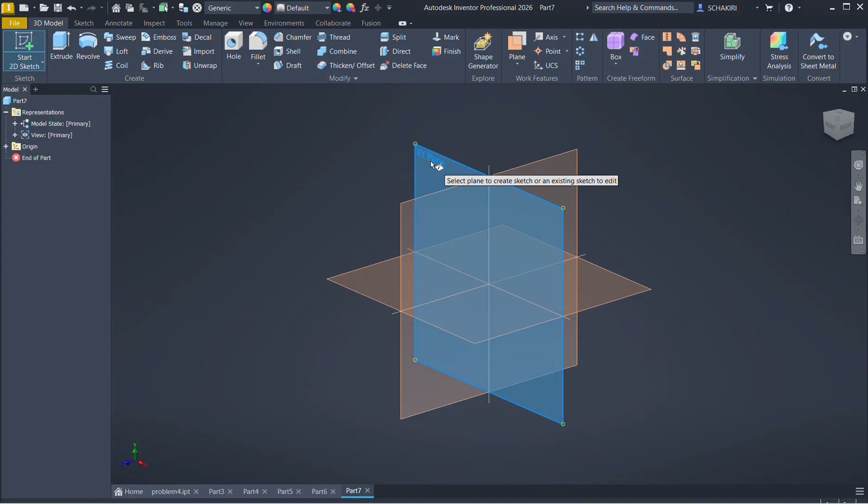So first rectangle. First of all, you should set up your units. We have here millimeter. So here you go to tools, document setting, and then you choose units and millimeter.

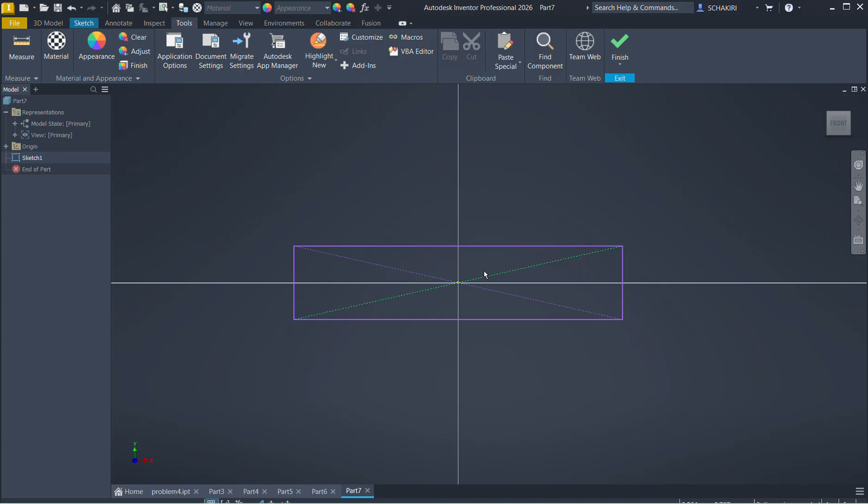So now we set up our dimensions. We have here, as we said, we have 10 millimeter, and for here we have 160. Yeah, is this surface from here to here.

So now we're gonna sketch our second rectangle like that. Of course, the dimension to make our sketch fully constrained and finished. We have the height is 35 millimeter.

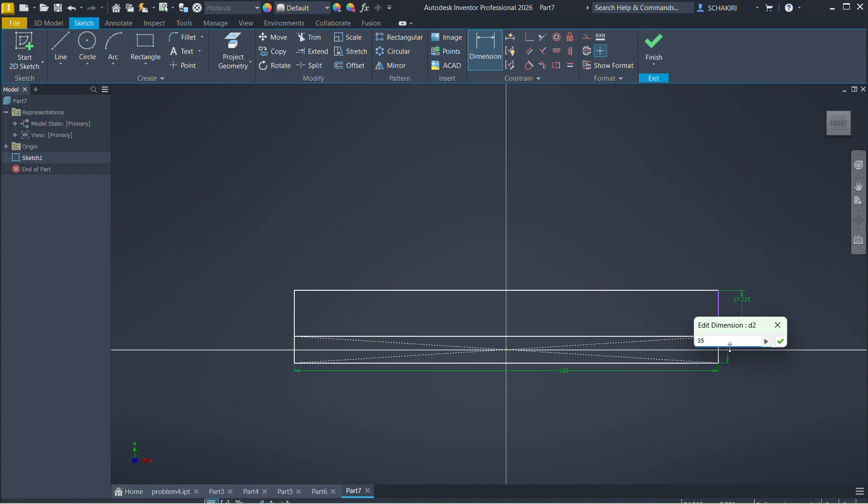And the third rectangle should be like this, who has a height of 10 millimeter. So to make these two lines finished, we should add some dimensions. Maybe we need this one.

Should remember always that we shoot dimensions from the origin of our plane. That's our origin.

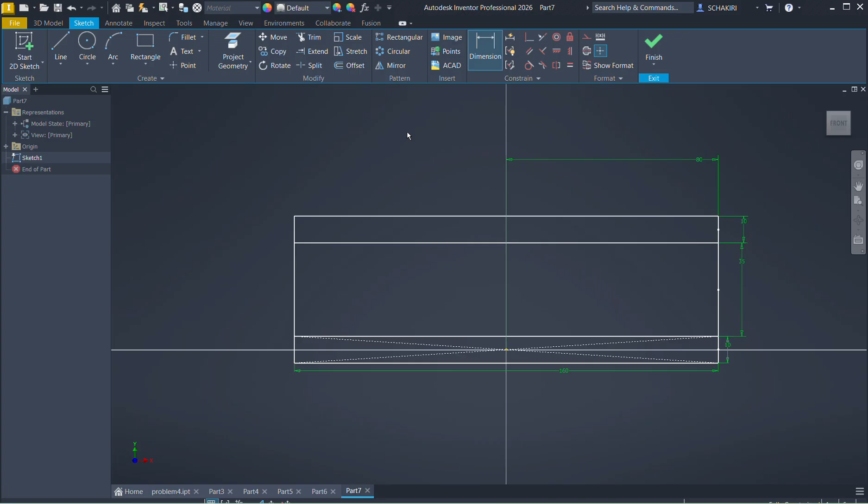So after we're gonna do the extrude, we go back always to our photo. We have here, we're gonna extrude this rectangle by 80 and this one by 10 and this one by 50.

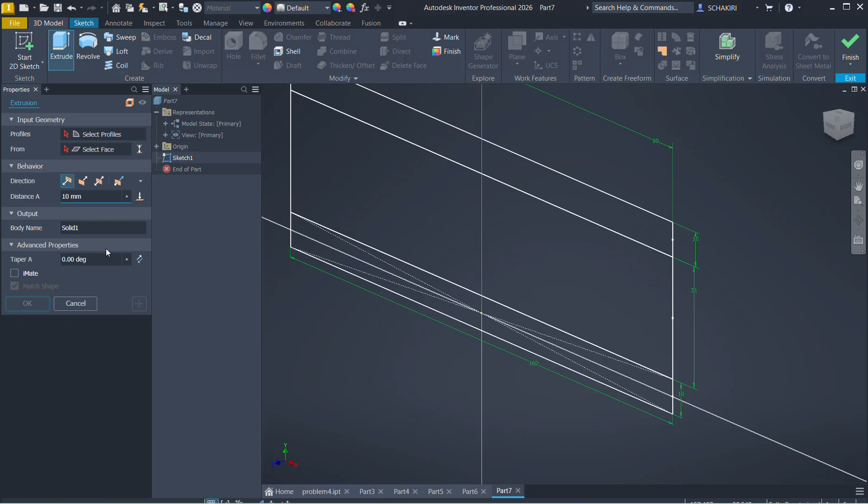So we choose the first profile. It's gonna be that one. Don't forget always to make everything symmetric. That way it's gonna be easy for the next features. Always center your sketch.

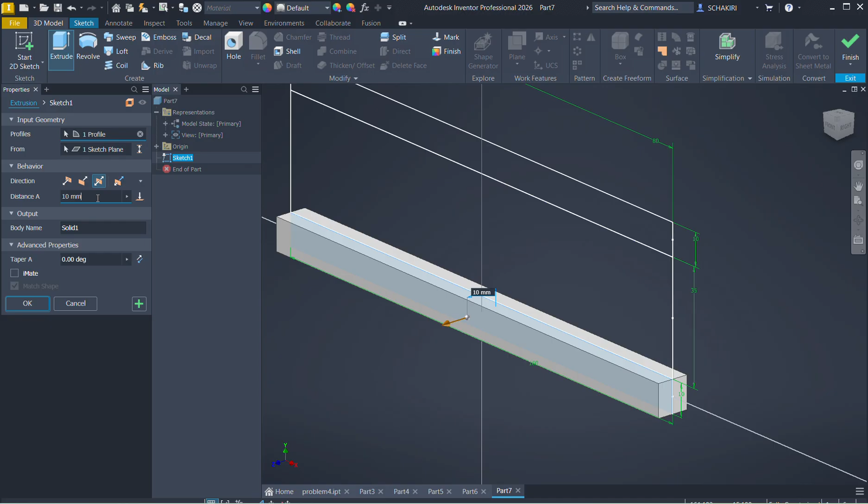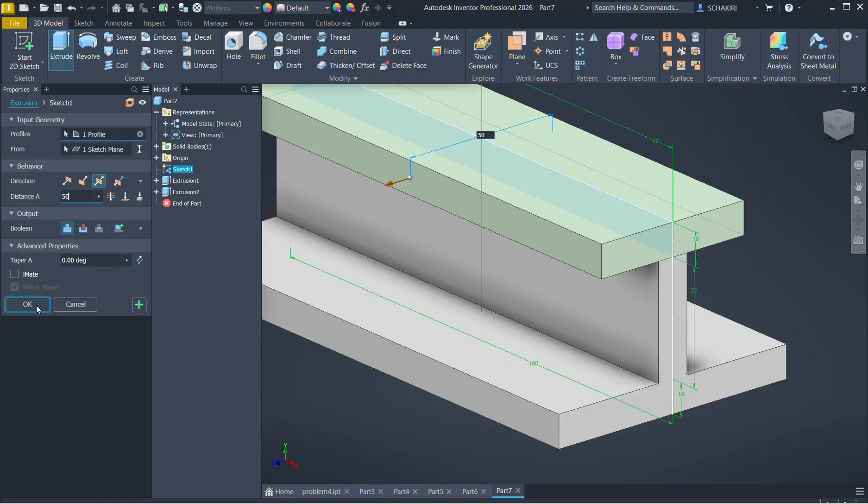We said for this rectangle it's gonna be 80, and for that one is 10, and for the small one it's gonna be 50. It's okay. That's our base profile.

Now we will try to add some cuts like uh, that one. As you see, we have from here to here is 22.

So if we add the radius of that fillet, and the radius of that fillet is 8 plus 8, so the length is gonna be 22 plus 8 plus 8. It will be 38. And for the depth, it's gonna be from here to here is gonna be the radius of that fillet, which means 16 plus the radius of that fillet too, which means 8. So it's gonna be 16 plus 8 is 24. Like this, we get the dimension of this cut.

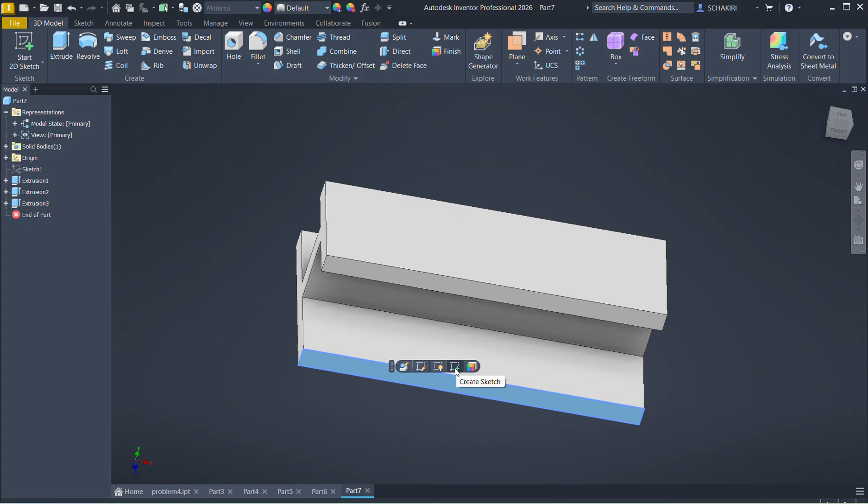So we're gonna try to sketch this. Of course, we're gonna sketch from that surface, and then we'll make extrude. So let's go here, make create sketch. We choose the rectangle, of course, to be always symmetric. We choose that one to point and center.

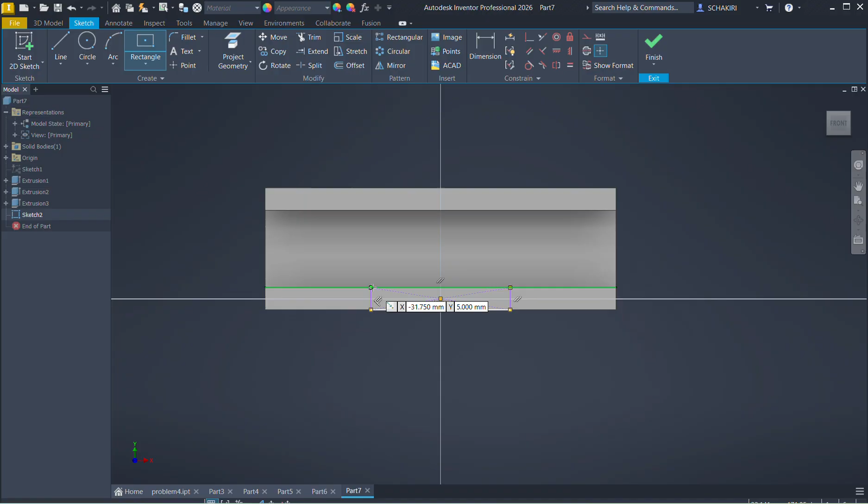That one is more easy, so you can start from the middle, and after you fix your dimensions, we said here it's gonna be 3/8, and then we will do the extrude.

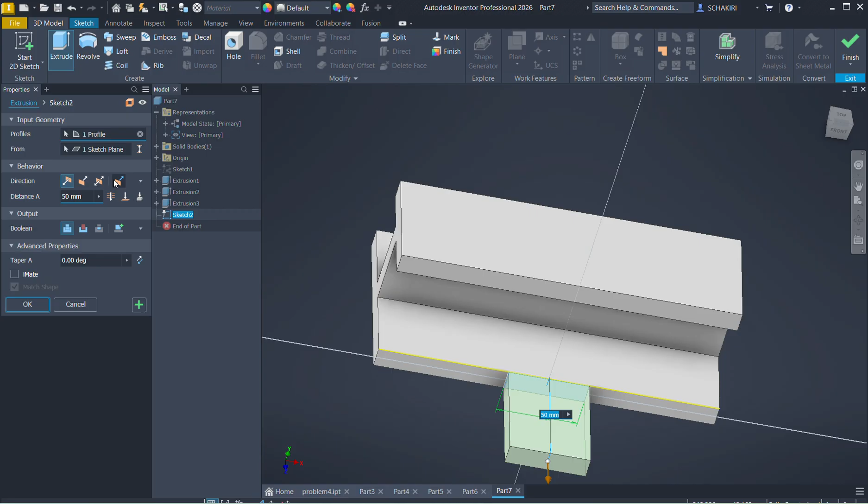We're gonna change the directions, gonna be the other side. Of course, we choose the boolean is gonna be cut, this one, and the distance is gonna be 24.

That's it. We should do the same thing for the other side, but of course, to make it easily, we're gonna use the mirror function. So here we have to create a mirror for parts or for feature. Here we select first your feature. It's gonna be this one. You should see it's on green.

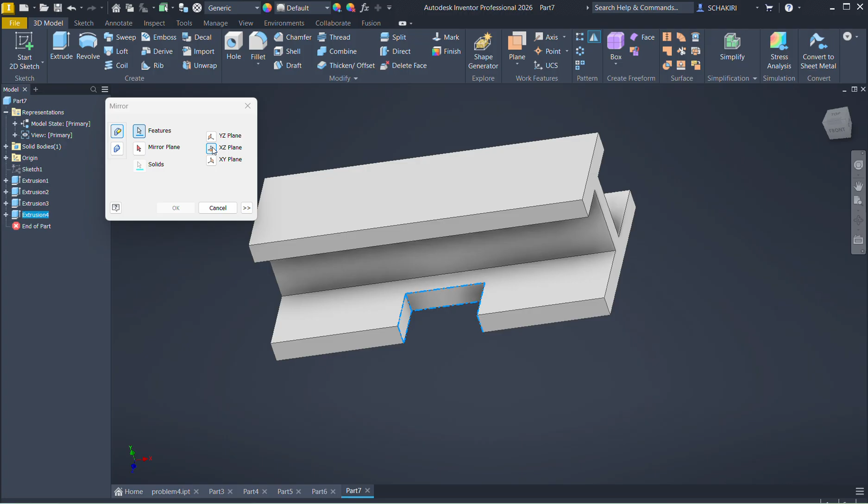And after you choose the plane of symmetric, it's gonna be XZ, and you hit OK. Here we go. It's easy.

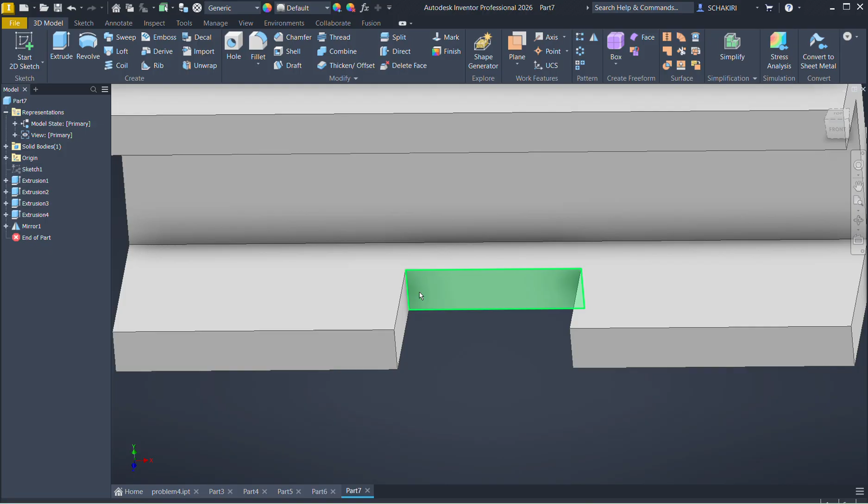Now we're gonna add fillets. Fillets for that corner, for this one, and all the fillets exist on the profile. You have fillet here of radius of 8, and the other ones is with a radius of 16.

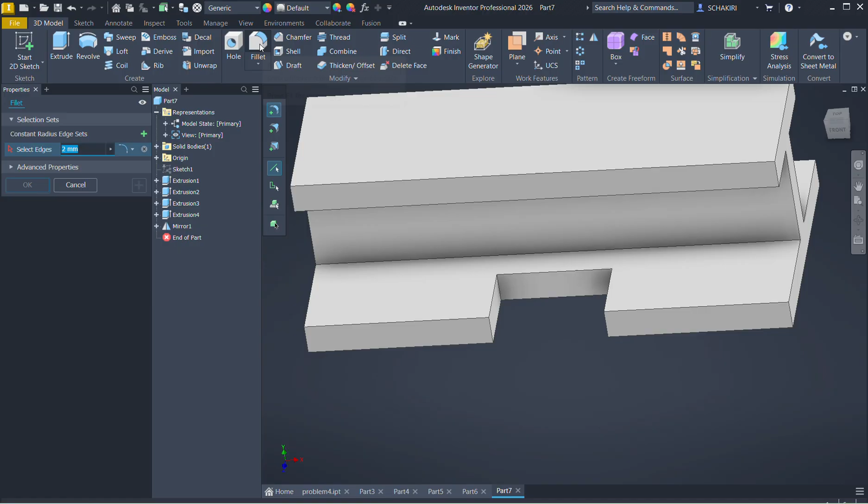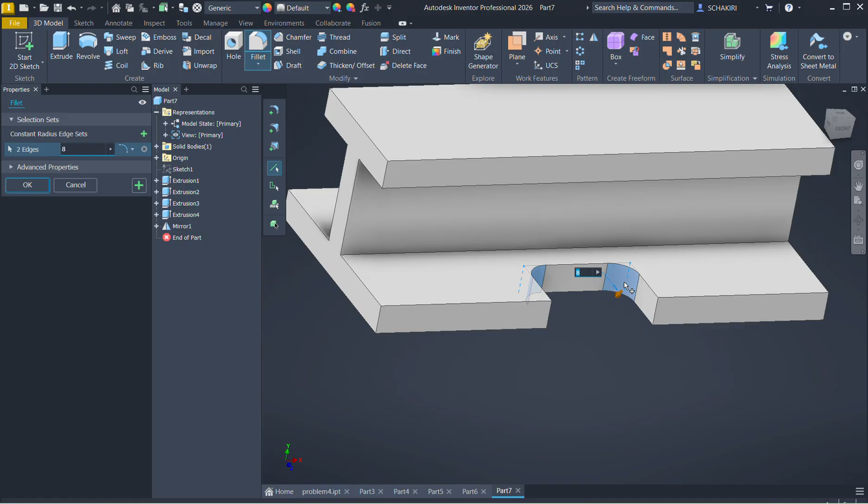So I'm gonna do one by one. Fillets, we hit fillets, Modify, we go to fillets, and you add your radius, and you choose the edge that has the fillet. For example, here and here. And here, those have the same radius of 8. And you hit OK. Or if you have more with different radius, you can hit

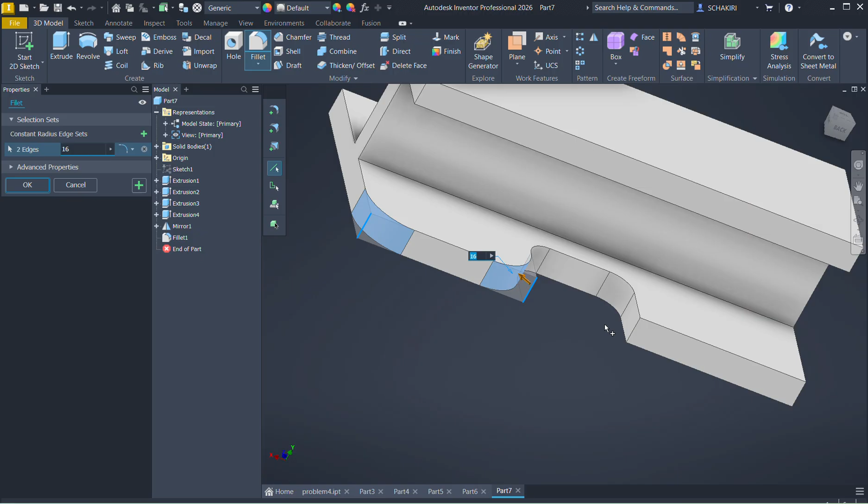plus, and you change your radius. We said that for those, they have 16 in the radius. So you hit 16 and you select the edge. It's easy. Like this. Here we go.

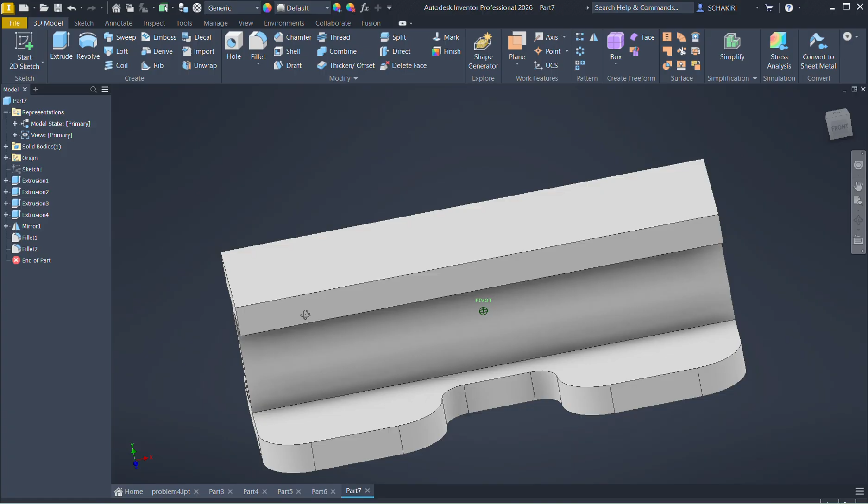Now the hardest part in this section is gonna be this curve. To draw that curve, it should be a born feature, meaning it's gonna be related to the origin.

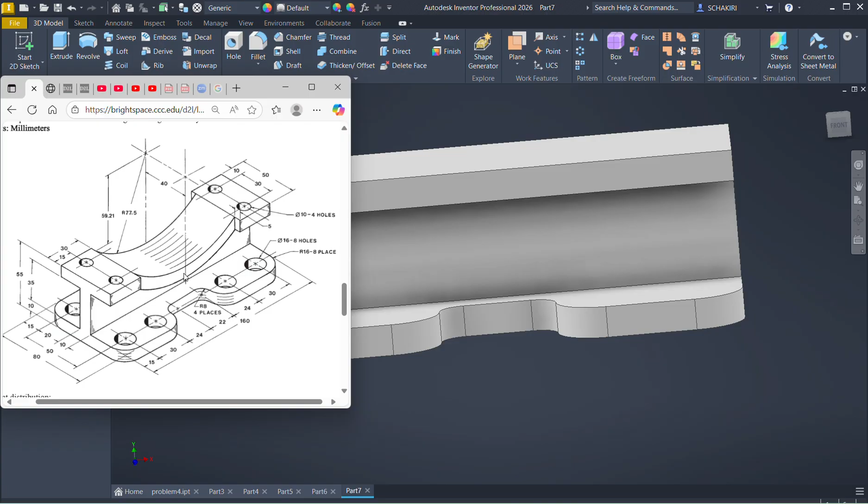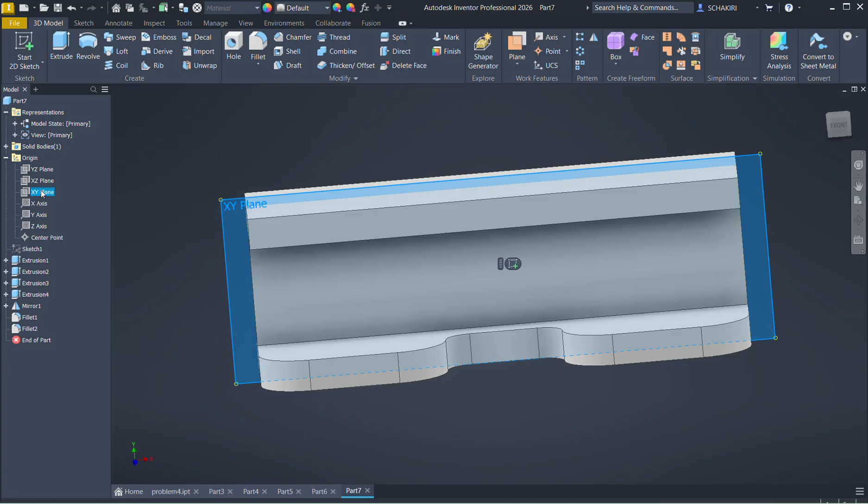So we should go to the origin, we choose the plane, it's gonna be the XY plane. We're gonna sketch from this plane like that. Double click and add sketch.

Let's zoom in to this drawing to see the dimensions. So we have here a circle of 77.5 radius, and the location of the center of that circle is gonna be at a height of 59.21 from the top view of that surface. And we have also another circle here.

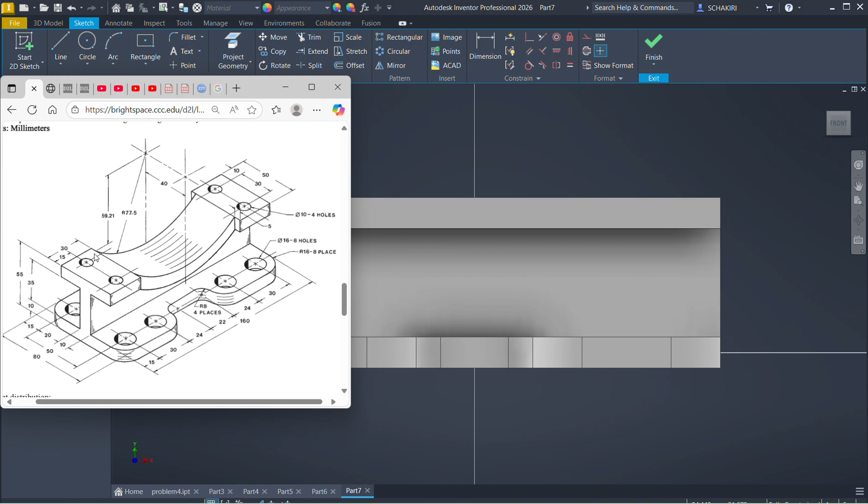So we're gonna figure out how to do that sketch. First, we're gonna find the location of the center of the circle, which is 59.21 from the top view. We're gonna draw a line like that of 59.21.

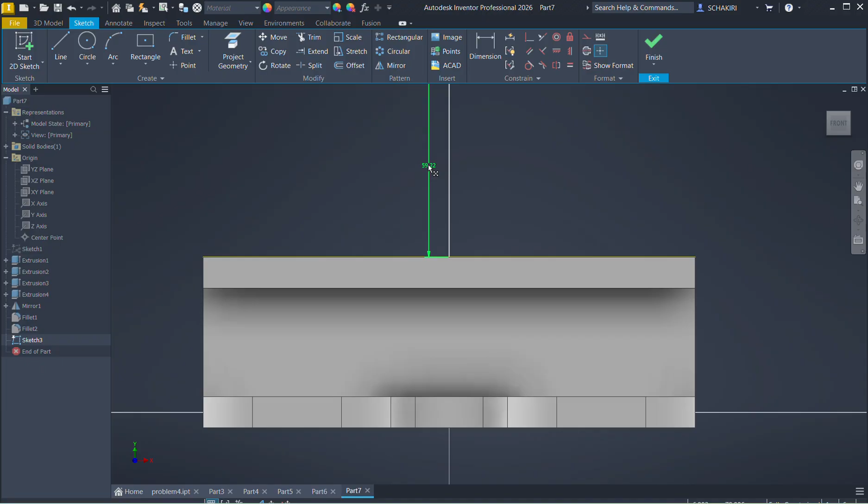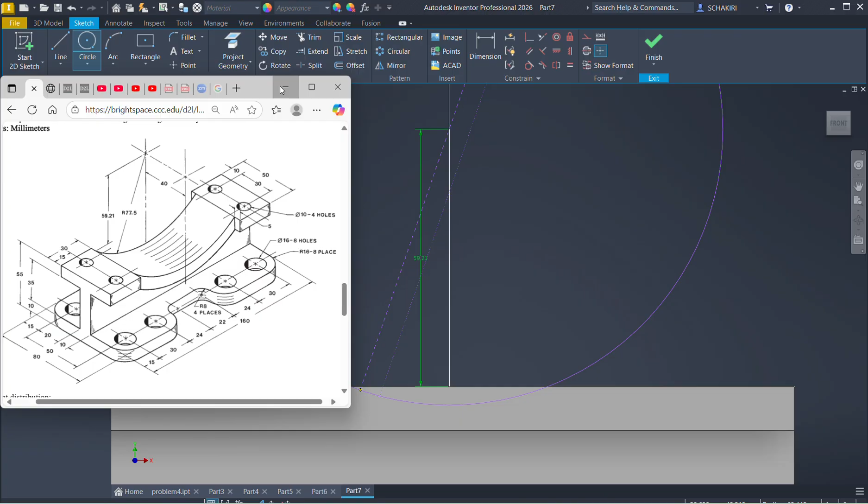And after, we're gonna draw a circle. A circle has a radius of 77.5, meaning a diameter of 155.

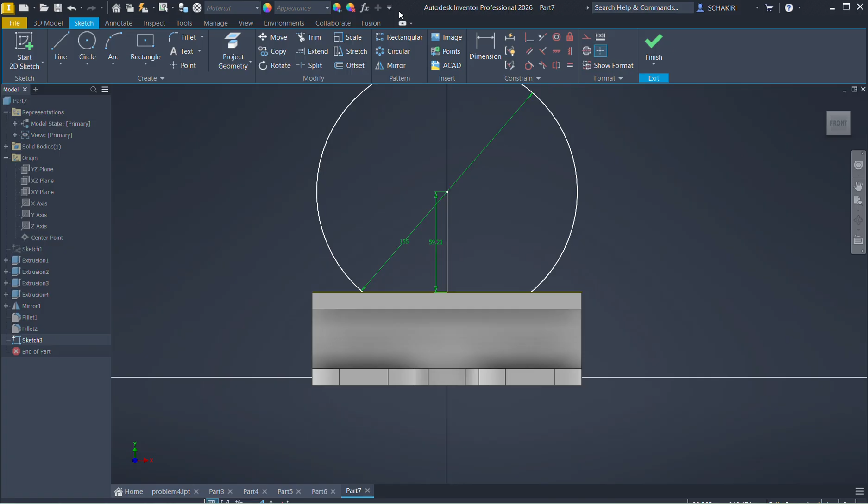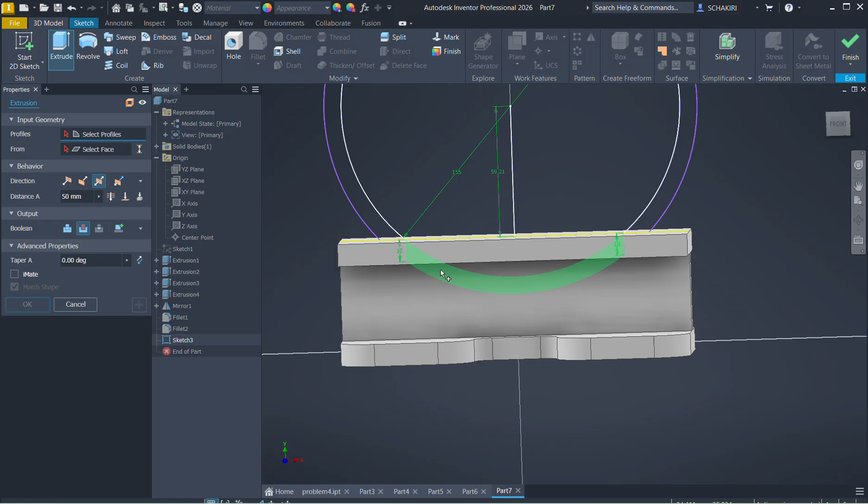Now after we offset the circle, we're gonna go to the extrude. First, we should cut this part. So we hit this one, choose Boolean cut by 50, and we choose this surface and this one. Also, we should extrude that curve, that one.

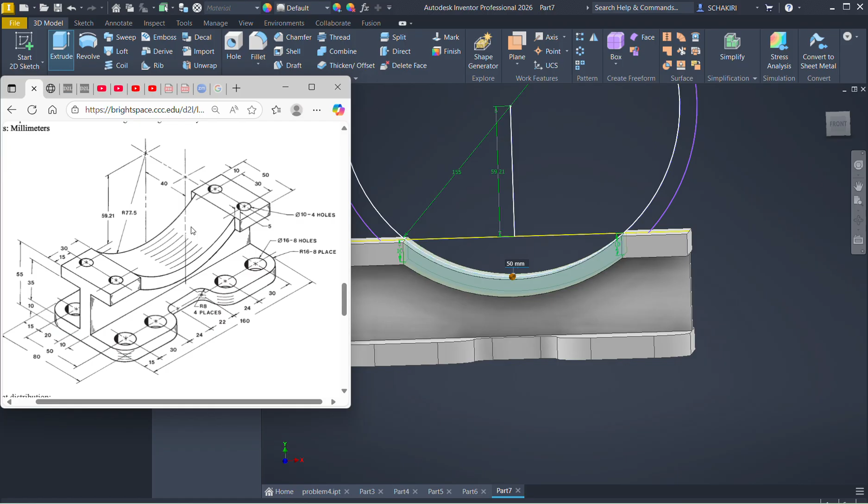So we hit plus and choose join, select this one. As we see in the file, we have that dimension of the curve — the width of the curve is 40. So here we hit 40, and we repeat. And we are done.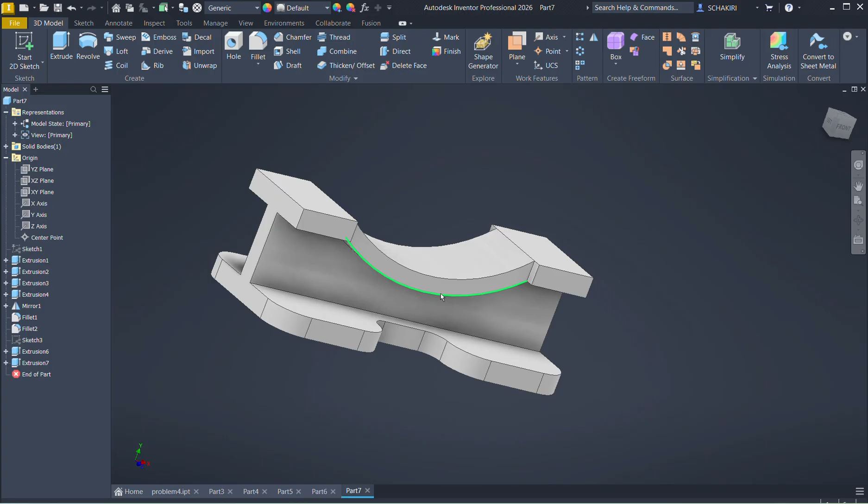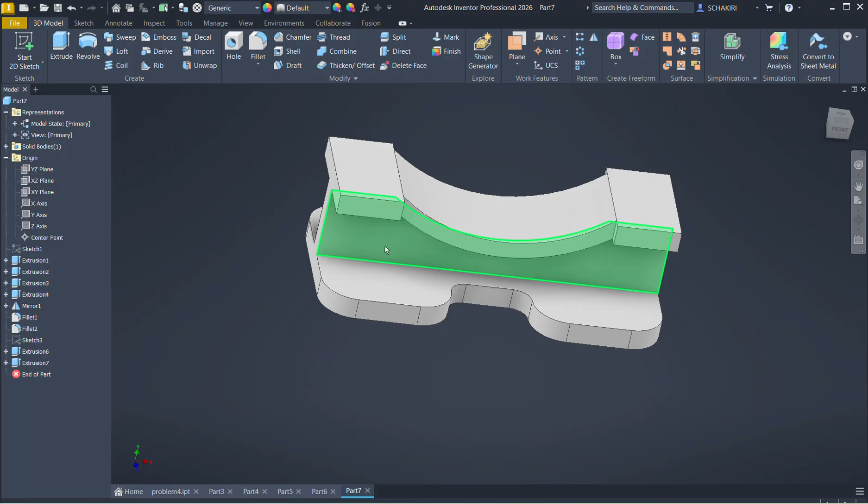Now we're gonna add the holes. We have 8 holes of diameter 16, and 4 holes of diameter 10. So we're gonna do them easily.

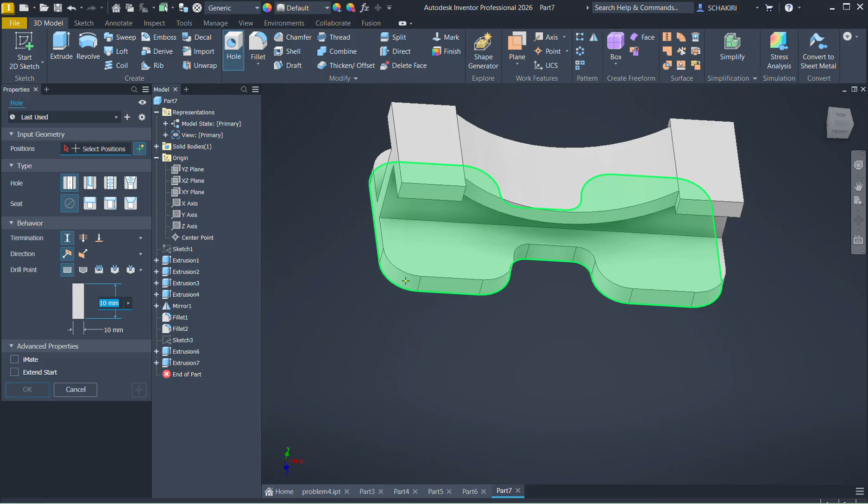We choose the regular hole, not countersink or counterbore, just the regular hole with the same diameter. For the parameters, the height of the hole is gonna be set, and either for this one it's gonna be 10, and the diameter here is gonna be 16.

So we hit here, we fix the distance — we have 4 holes by 15 and 15. We click on this edge to add the location of the hole from that side, it's gonna be 15. We select this edge, don't hit OK until we finish. Hit that edge and add the dimension for the location of the hole from the other side, it's gonna be 15 too.

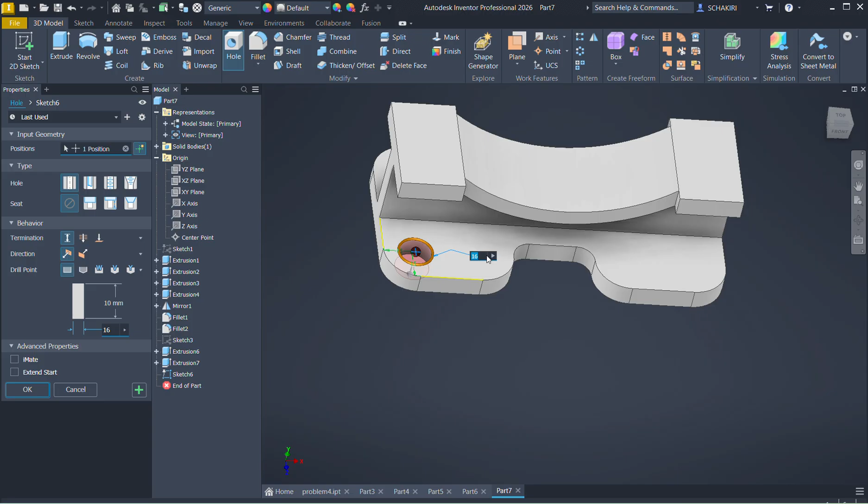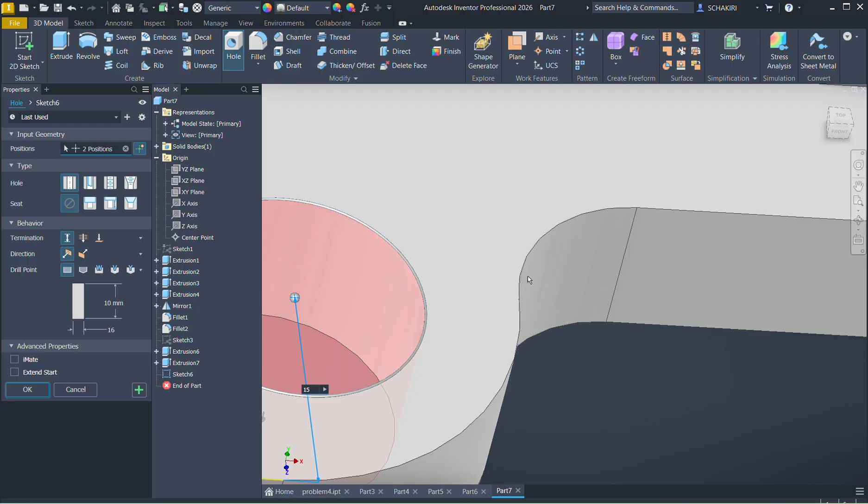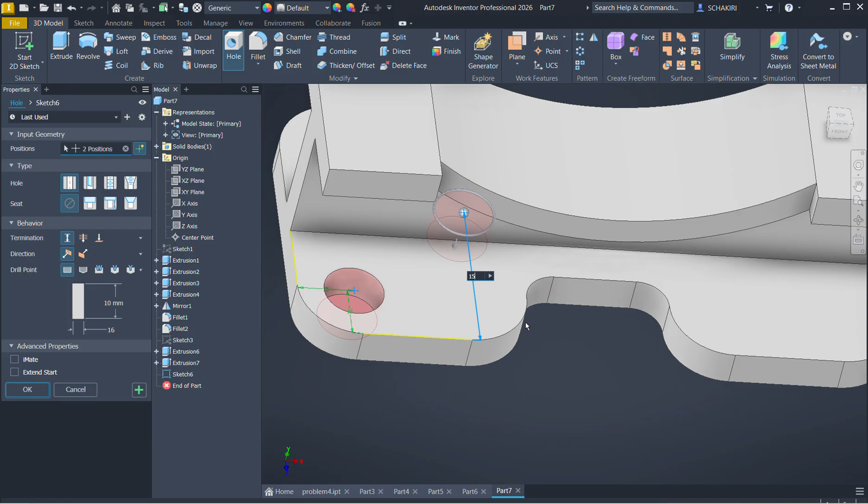We add the other hole, doing the same thing. Don't hit OK, just select that edge, add the dimension of 15, and select this edge — we can't select this other one because it's a fillet. So what we're gonna do is choose that one instead. It's gonna be 15 plus 30, so 45. For that one it's 15, and from here it's 45. There we go, now we hit OK.

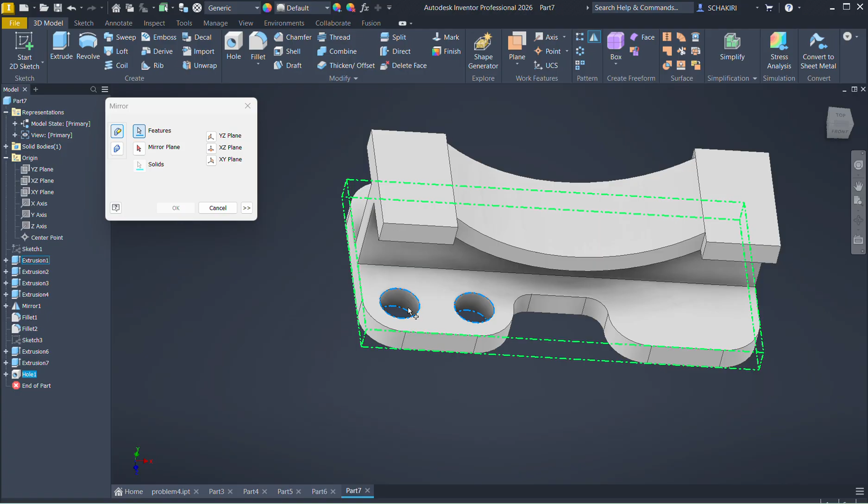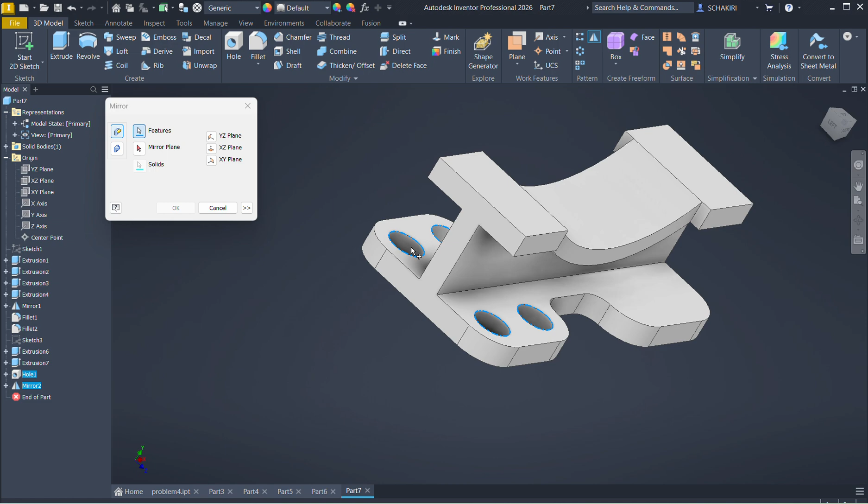After, we're gonna use the mirror for the other holes. We choose mirror for those, select the feature — the two holes — and the symmetric plane. We start with XY and hit OK. We do the same thing for the other side: we select those holes at the same time, choose the YZ plane as the symmetric plane, and hit OK.

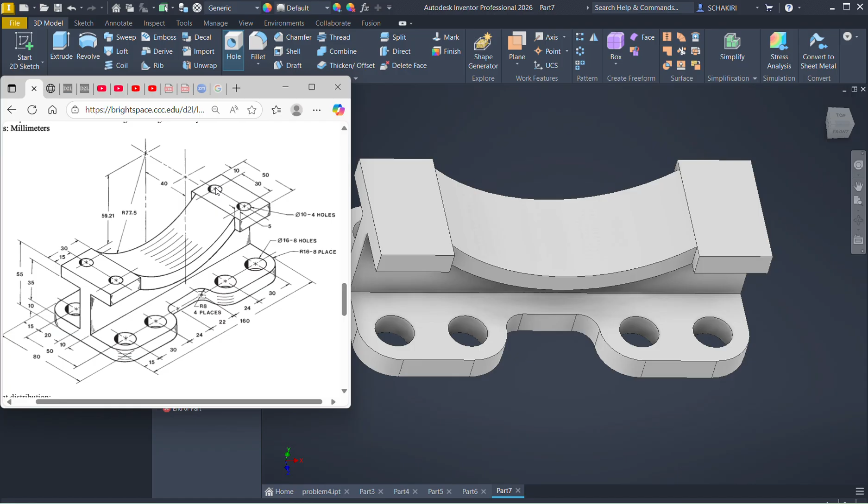We're gonna do the same thing for the hole of this part. We have a hole of 8, the height is 10, and the diameter is 8. We should pay attention to the location of the hole — it's 15 from here to here, and the other one is 10 from the edge to the center. So it's 10 here and 15 here.

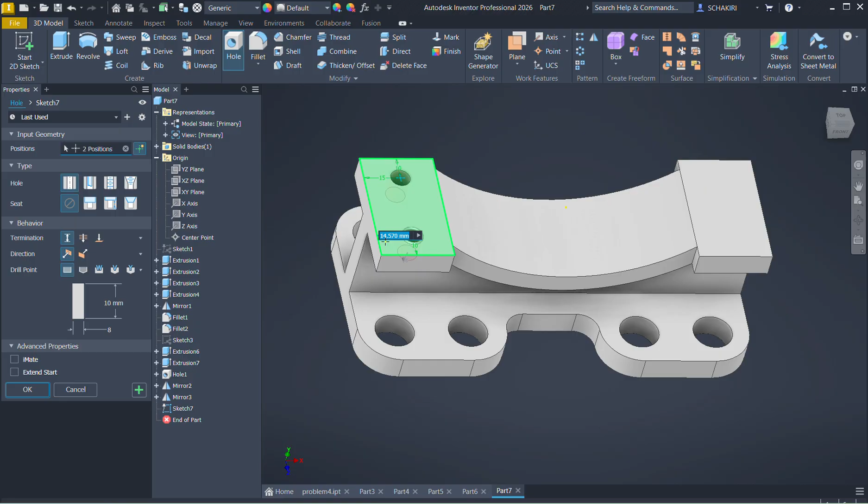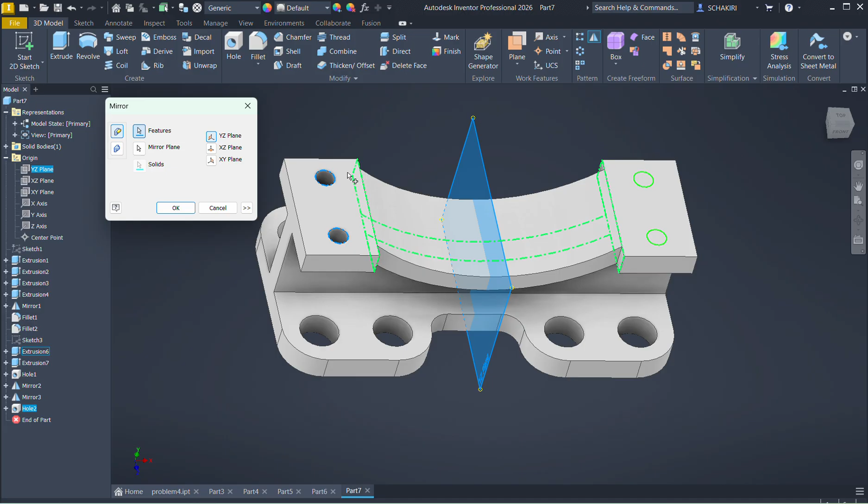We're gonna add the second one, it's gonna be 10 from here and 15 from here, and we hit OK. We do the mirror again, choose the feature — the two holes — and the plane is gonna be YZ. If you're confused about which plane to choose, just try them all and see which one makes a good symmetry. For this case it's YZ because we want to copy these two holes to the right side. So we choose the YZ plane and hit OK.